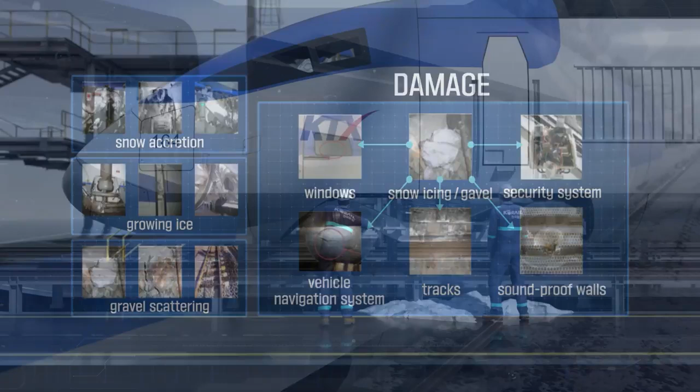When trains operate in snowy winter, they suffer continuously from snow accretion and icing. In addition, maintenance requires a lot of costs and manpower every year. Therefore, we've needed to develop a technology to prevent snow accretion and icing on the railway coaches.

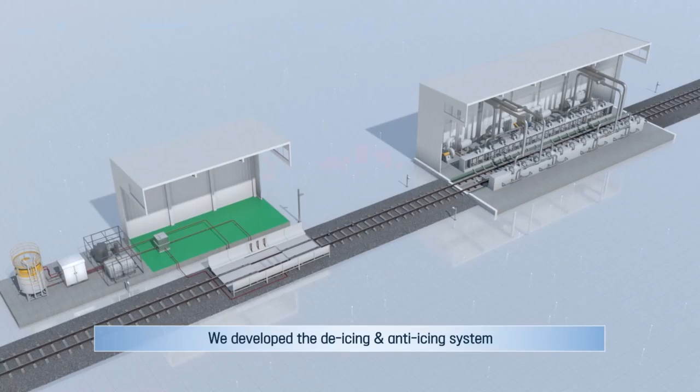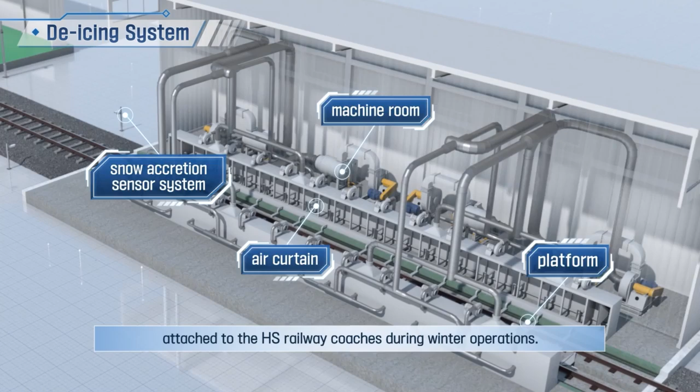We developed the de-icing and anti-icing system to prevent snow accretion and icing. The de-icing system is the equipment to melt down snow ice attached to the HS railway coaches during winter operations. The anti-icing system is the equipment to prevent snow accretion by spraying anti-snow accretion solution onto the trains operating in winter.

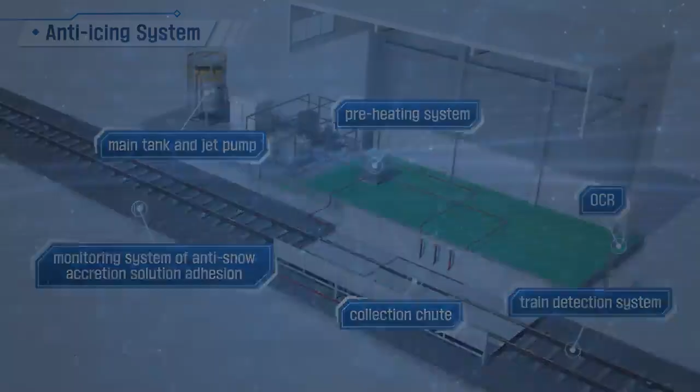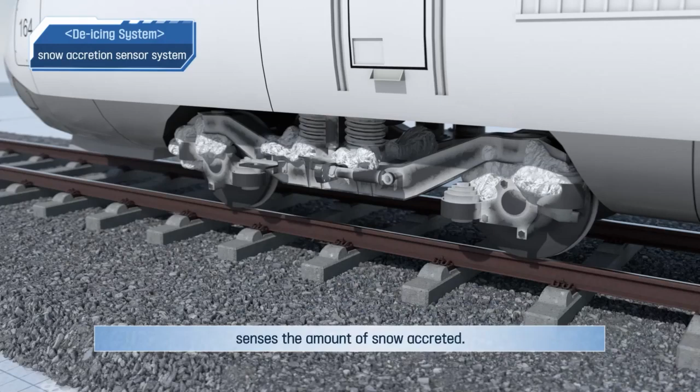When a train enters, the snow accretion sensor system, which is applied with a world-first de-icing system, senses the amount of snow accreted. As a railway coach and snow ice are different in temperature, they have distinct colors and depth values. Our system analyzes the wavelength ranges by temperature difference and material and identifies snow icing zones.

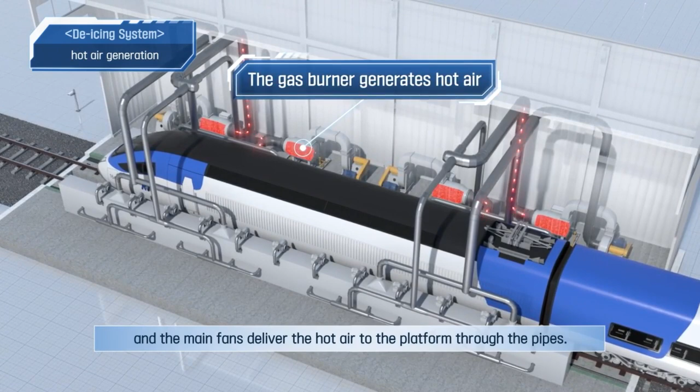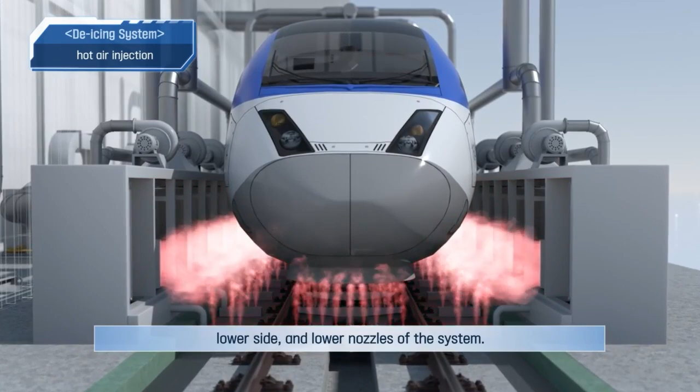In the system, the gas burner generates hot air and the main fans deliver the hot air to the platform through the pipes. For minimum heat loss, the pipes are heat insulated. The hot air delivered to the platform is injected onto the trains through the side and lower nozzles of the system. The air curtain nozzles are installed on the sides of the platform so that the concentrated hot air can be sprayed on the lower parts of the train.

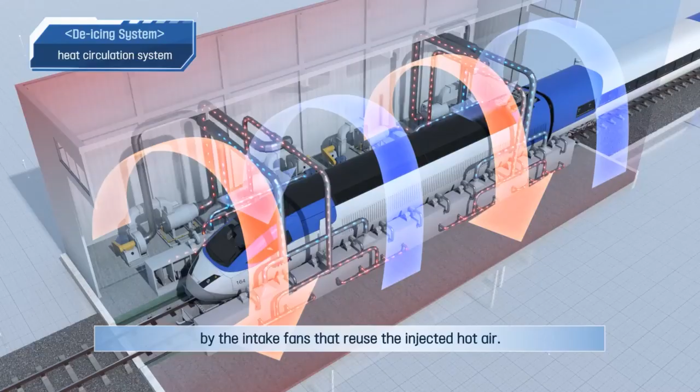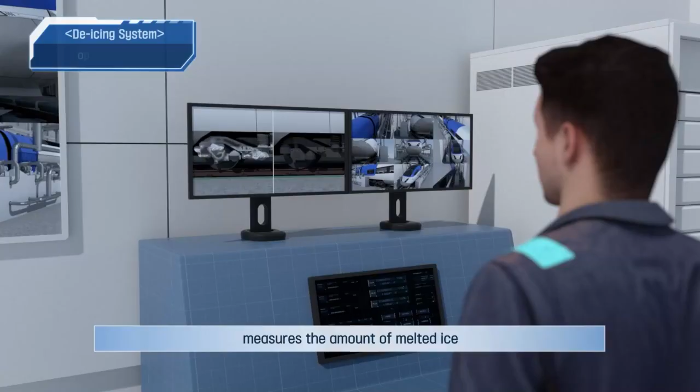The efficiency of the hot air is maximized by the intake fans that reuse the injected hot air. The injected hot air melts down the snow and ice stuck to the lower part of the railway coach. Once the coach's de-icing work is completed, the snow accretion sensor system installed at the exit measures the amount of melted ice and compares the data before and after de-icing, which is transmitted to the server. The operator can control the system on CCTV in a safe operating room, which is separated from the machine room.

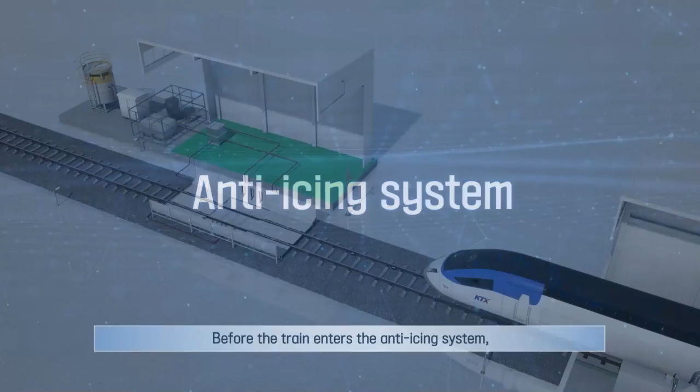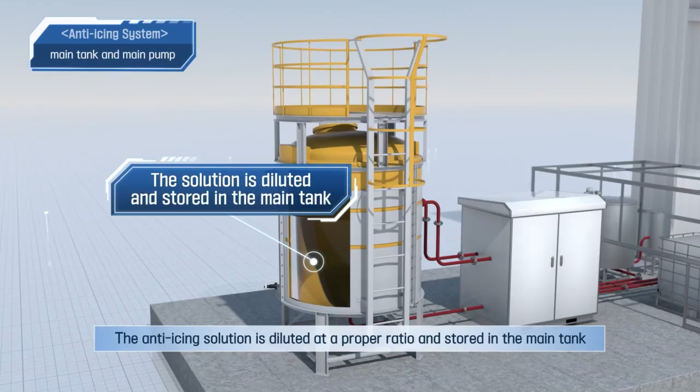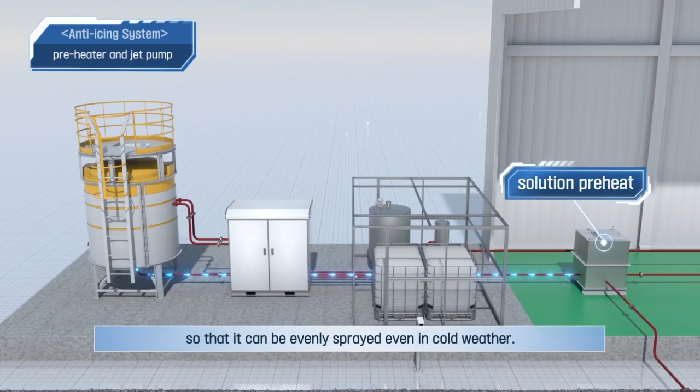Before the train enters the anti-icing system, the sensors installed on the tracks recognize it entering, and the OCR scans the coach number. The OCR is the equipment that reads the printed characters using light and records the data in the computer. The anti-icing solution is diluted at a proper ratio and stored in the main tank through the concentration meter. The diluted solution is sent to the preheater through the main pump line. The delivered solution is preheated so that it can be evenly sprayed even in cold weather.

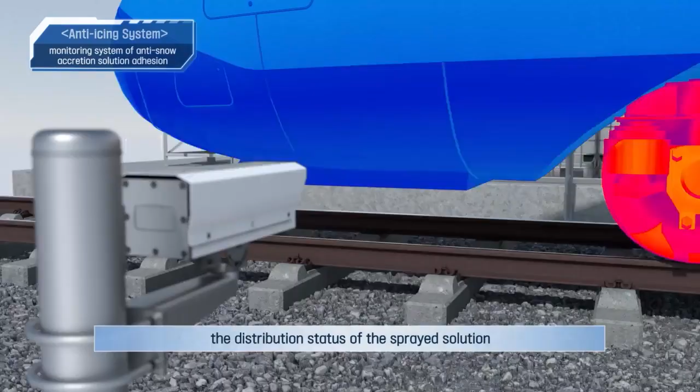The preheated anti-snow accretion solution is passed to each jet nozzle by the injection pump and sprayed onto the train evenly. The thermal imaging camera displays the distribution status of the sprayed solution, and it is quantified and sent to the server. The solution left after the application is collected through the collection chute below and mixed with the undiluted solution in the main tank at a proper concentration ratio. This recycling can save costs.

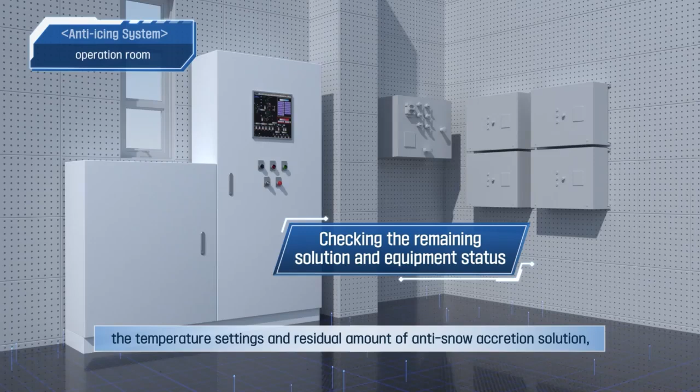In the operating room, the operator can safely check the temperature settings and residual amount of anti-snow accretion solution and the status of the system and error alarms. These all can be controlled remotely.

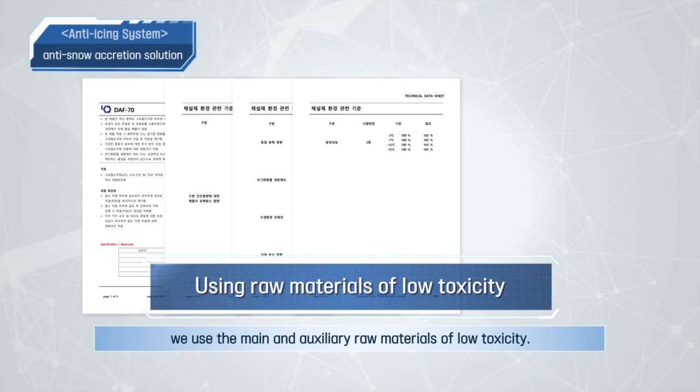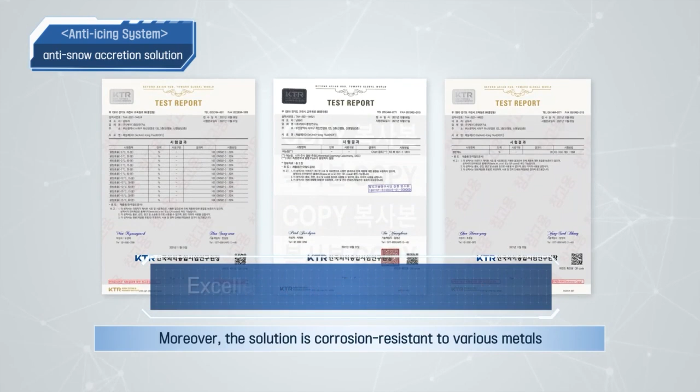For the anti-snow accretion solution, we use main and auxiliary raw materials of low toxicity. Therefore, no hazardous substances are discharged during manufacturing and consumption. Moreover, the solution is corrosion resistant to various metals and excellently protective of non-metals. More than 90% of its organic compounds are biodegraded, and the acute toxicity is above EC50, 100 mg per liter. Furthermore, the solution does not contain any substances subject to acute first-class, hazardous to the aquatic environment, so it is an eco-friendly material that does not cause ecotoxicity.

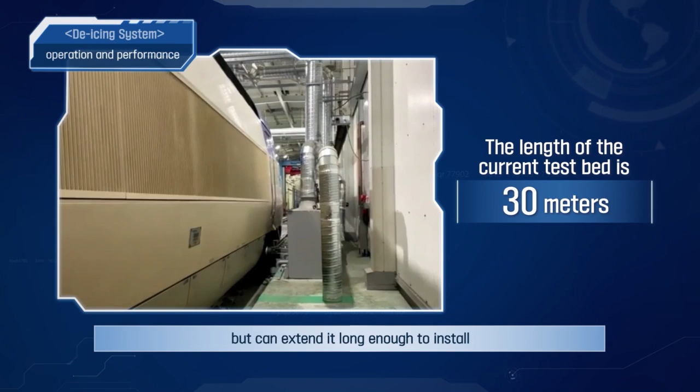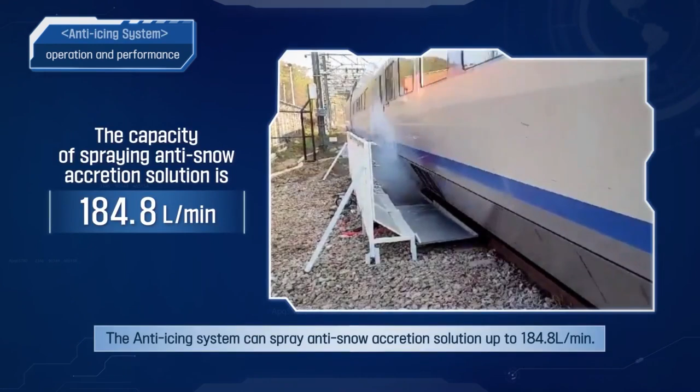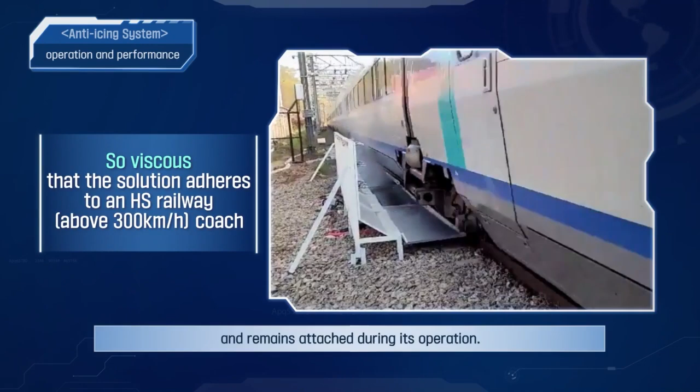The de-icing system can remove snow accretion from 20 coaches per hour and about 559 kilograms per hour. Currently, we use the test bed of 30 meters but can extend it long enough to install a non-stop de-icing system if space is secured. The anti-icing system can spray anti-snow accretion solution up to 184.8 liters per minute. At a train speed of 30 kilometers per hour, it sprays 31 liters and collects about 15 liters per coach. The anti-snow accretion solution is so viscous that it adheres to the HS railway coach and remains attached during its operation.

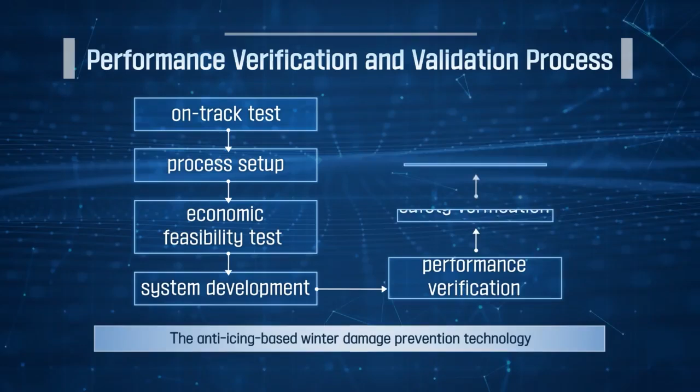The anti-icing-based winter damage prevention technology observes the following process of performance verification and validation. It is anticipated to both strengthen the competitiveness of domestic railway technology and give the domestic industry a competitive advantage in overseas markets, as well as secure reliability for the system.

We can expect this technology to contribute to preventing damage to railway traffic, which often occurs in countries with extreme climatic conditions in winter, and improving the safety of train operations and the people through the acquisition of preemptive technology. We will share a safe and happy daily life with our customers with anti-icing based winter damage prevention technology for high-speed railway coaches. Thank you.